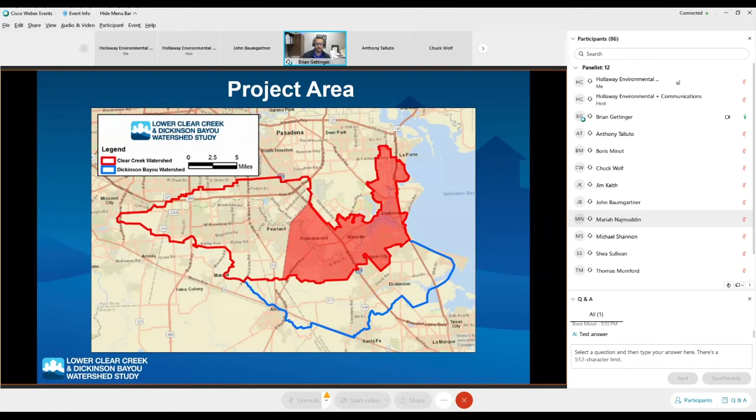A little more on the focus. I mentioned, and you're going to hear this a lot tonight, this is a riverine regional magnitude study. So that means that when we show damages, those damages are along the creeks. They may not be as significant as what actually happened during Hurricane Harvey.

So you might see one of our inundation maps and say, hey, I flooded during Harvey, but my house isn't shown as flooded on this map. That's because people further away from the channel may have flooded because of backed-up storm sewers and other things. One of the next steps we'll talk about toward the end is how we tie in those local analyses to make it a more robust effort.

We are looking at Atlas 14 rainfall intensities. That's the newest rainfall data available. We're looking at a 24-hour storm duration.

The flood risk analysis is going to show flooding along the creek, but damages and flooding instances are going to be higher than we talk about tonight. We're showing some very high damages and flooding instances, but in reality they're even higher. That's evidence from people's personal experiences, and from information we've got from the City of Friendswood and City of League City about what homes flooded and where they did rescues during Harvey. That's something we can tie into this now that we have the base model for the creek. The creek governs everything, and now that we have it, we can look at how those local storm sewers work.

So we are looking at 2, 5, 10, 50, 100, and 500-year storm events. The 500-year storm event is actually larger intensity than Hurricane Harvey. Hurricane Harvey, based on the new Atlas 14 rainfall data, is about a 125, 150-year storm event. So we did model Harvey, and we are looking at all those different storm intensities as well.

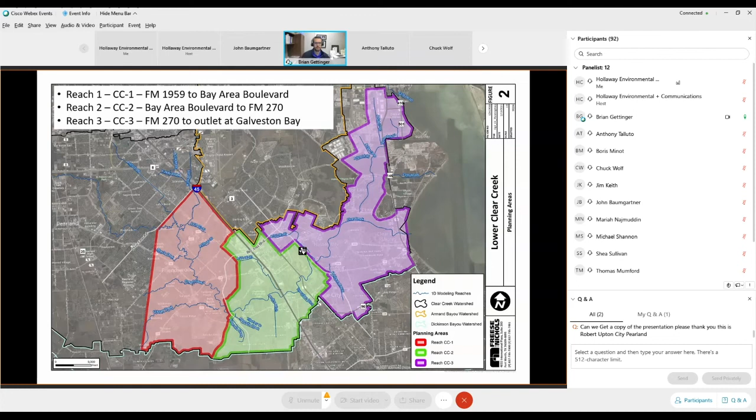So why are we here tonight? What's our purpose? The study is not done. It's getting close to being done, but we're here tonight to tell you what we found and allow the public a chance to weigh in on that before we finalize our final reports. So we have this slide deck, this material, a lot of analyses to present tonight, but we haven't written the final report yet.

We want to make sure we had a chance for the public to weigh in on what we're presenting, get input again from the stakeholders, and make sure that what we're presenting is what makes sense and what the public wants and needs to mitigate flooding.

Doing this whole project through COVID was challenging. We were able to sneak the first public meeting in person, so I appreciate the chance to meet a lot of you there. Online is different. I'd much rather be doing this in person with you guys, talking face to face. But we do have the opportunity to record this, and we can post it online. So I think we are getting pretty good feedback and information dissemination, which is good.

So tonight's about sharing results. We do want your feedback, we do want your questions. As you have questions during the meeting, please throw those in the Q&A, and we will address those either in real time for whoever's not speaking, or if we don't get to it, we'll get to it at the end after we're done with the presentation.

All right, so timeline. We are at the end, right? We're at March 2021. Initially, the project was scheduled to get done in May 2021, but we know every month counts, and we're looking at hurricane season starting again pretty soon. So we bumped this up a couple months to try to be as succinct as we could with the study.

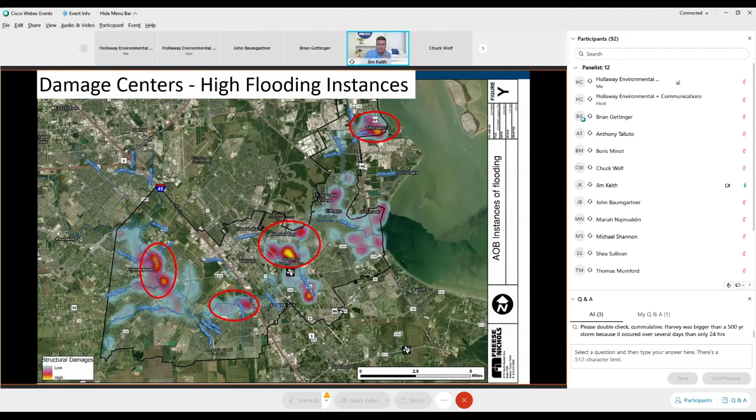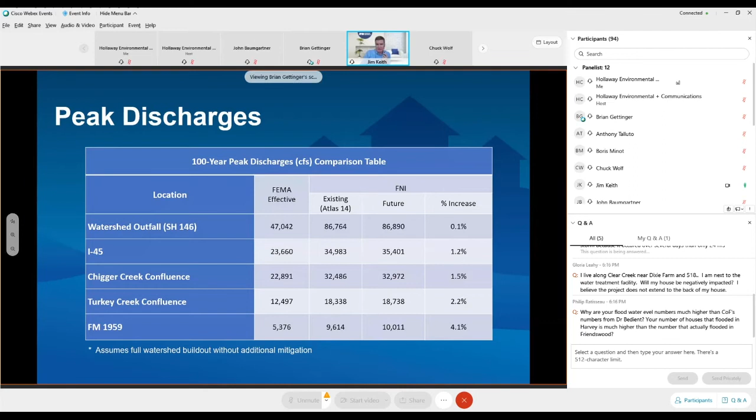The other thing that we looked at is future conditions. So we looked at projected land use 50 years into the future. Now, obviously, much of Clear Creek is already developed, so there's not a lot of changes that we saw here. There's a little bit of increase near FM 1959, but for the most part, we don't anticipate a lot of changes in terms of future runoff conditions.

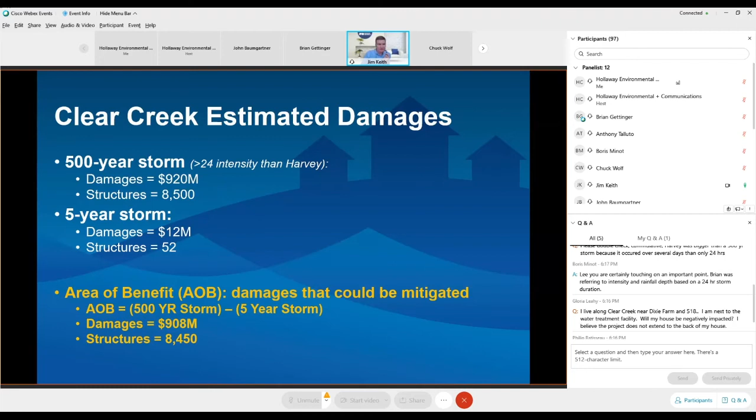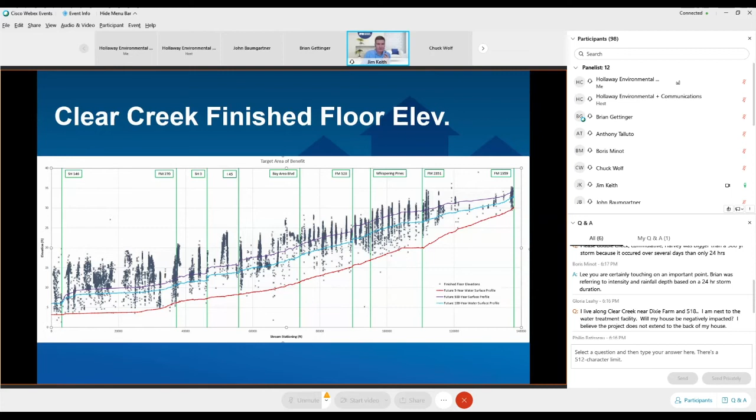To summarize, on the pure flood risk assessment of structures, we looked between these three planning areas or reaches. We looked at individual storm events. You can see in this table here, we looked at a 500-year event, 100-year event, 50-year event, 10-year event. But what is really informative, and what helps us quantify both costs and benefits, is to look at the estimated instances of structural flooding over a 50-year period.

If you look at the statistical projection of these different storm events, from frequent 2-year, 5-year, 10-year events up through the 100-year and 500-year storms, over a 50-year period, you can see that for the Clear Creek study area, we have over 10,000 instances of flooding that we would expect over that 50-year period. And the damage, just based on current property values, is $365 million.

And we know over the past 20 years, the actual frequency and intensity of these storms can vary greatly.

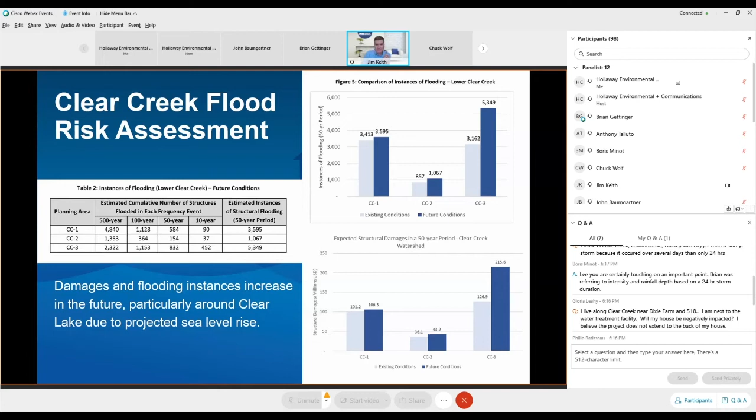The other flood risk, and a couple things we'll talk through here: the previous slides were really focused just on the riverine flooding aspect, but the other risk here in the lower end of Clear Creek is really sea level rise. The Corps of Engineers provided support for us on this project, developing sea level rise projections and also storm surge frequency projections.

For our study, we assumed in the future a water surface elevation of about 6 feet for all events greater than the 10-year event. This accounts for both a 5-year storm surge stage, higher than just high tide or normal high tide, assuming some storm surge coming from the event, as well as the mid-level sea level change projected by the Corps.

You can see there's a lot of structures in this red inundation mapping showing that elevation, and there's 225 structures, give or take, worth almost $90 million that are at risk just from that sea level rise assumption. The other thing is it really reduces our ability to get water out and reduce that water surface elevation downstream of FM 270. So this is another one of the challenges in terms of flood mitigation, as well as another flood risk we felt was important to communicate as part of this study.

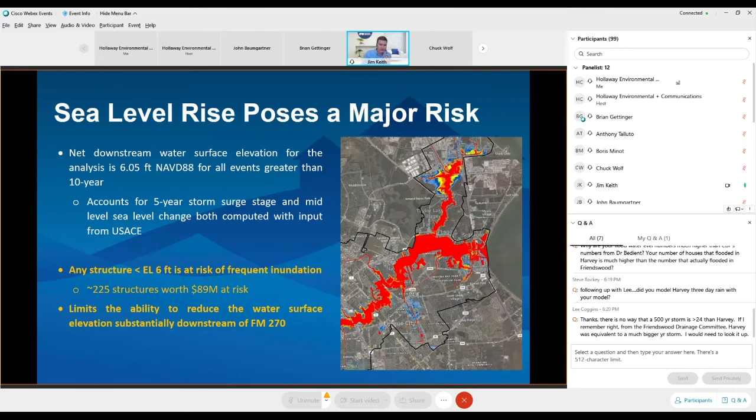The next things we looked at are transportation system impacts. Along with just structural flooding, when flooding happens, it impacts our ability to get around. It impacts your ability to go pick up your kids from school, get to and from work. It impacts emergency responders. So we used the United States Bureau of Reclamation's flood hazard calculation, which uses both the depth of overtopping of a roadway as well as the speed that water is moving to estimate what they call a damage classification or danger classification.

They have a low danger, medium judgment zone, and high danger zone. As you look at this map, red triangles are bad—those are areas expected to flood at a 5-year or less storm event with a high danger classification. The green circles are a low danger zone, even up to the 100-year event. The major crossing of greatest risk we identified was Whispering Pines Avenue, impacted in a 10 to 50-year storm event.

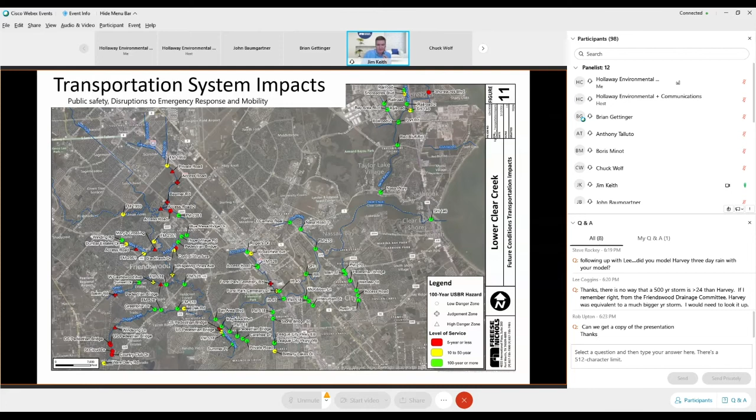Finally, we looked at critical infrastructure—water supply infrastructure, emergency services, schools, hospitals. This graphic shows the 100-year flood elevation, and you can see there's a significant amount of water infrastructure, those little water drop symbols, inundated in a 100-year event, as well as LaVaugh Stewart Elementary School, near SH 146 and Marina Bay Drive. A lot of the other flood risk results we wanted to communicate show how impacts propagate out from flood events for critical infrastructure.

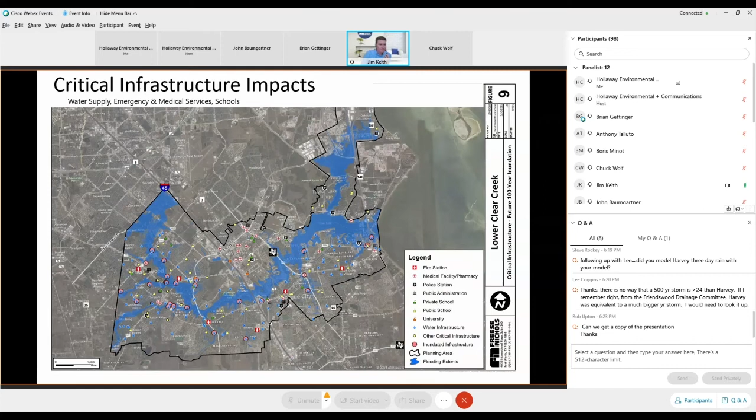So finally, just to summarize in terms of damage, future instances of flooding and future damage amounts in dollars: Reach 1 through Friendswood has pretty limited damage up to about the 10-year event. But once you get beyond that, the water starts getting out of the bank, and you see increasing orders of magnitude in both damage and instances of flooding—significant damage exceeding $1 billion and 4,800 structures for a 500-year event.

Reach 2 has a little less development than Reach 1 and 3, so there are fewer structures, but you see a similar pattern where damages escalate beyond the 10-year event. Reach 3 has less favorable performance relative to the 10-year event, due to sea level rise and the downstream water surface controlled by Galveston Bay. This structural flooding is from riverine flooding, so there are other impacts from local flooding and drainage not accounted for here, but we anticipate that could be looked at in future phases.

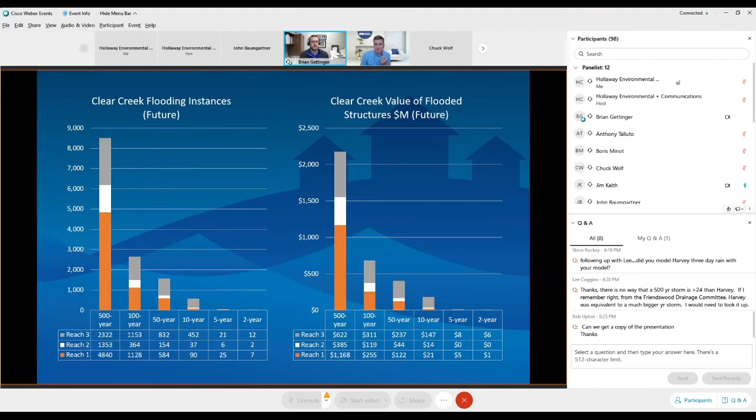I think with that, I'll pass it back to Brian to start getting into the mitigation alternatives. Thanks, Jim. Appreciate you setting the stage for us to talk through the alternatives here.

It can rain really hard. We looked at a lot of different storm events. The question now is, how do we evaluate those alternatives we're looking at? We talked through some of these concepts at previous meetings. We're going to present a lot of data in the next slides—for everyone's sake, the slide deck will be available for review later, so we're going to go through this pretty quick. We won't talk through individual alternatives tonight.

We'll talk through in detail the combination alternatives, and I'll spend time on each of the individual components. The final report, when published, will go through each individual alternative and show how it performs individually, but tonight we're going to focus on the combinations. First, let's talk about how we're going to evaluate them.

We're going to look at quantitative and qualitative evaluation criteria. Number one, how often is something flooding, and if we have an improvement, how much less often will things flood? That's instances of flooding, looked at over a 50-year period—a statistical analysis covering the 2, 5, 10, 50, 100, and 500-year storms, showing how often it's going to happen in a 50-year period. That's a standard practice established for benefit-cost ratio based analysis.

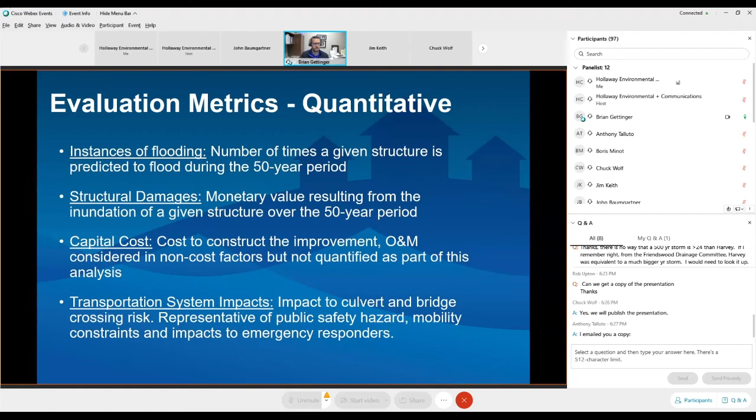Same thing applies to structural damage—the monetary value of structures is based on the depth of water in the home, an Army Corps of Engineers standardized procedure based on total value and depth, using the same 50-year analysis. We'll also look at the capital cost to construct these; as a high-level concept study, the cost doesn't have a lot of significant figures, but it is order of magnitude correct. Finally, Jim mentioned transportation system impacts—how many times culverts are overtopped, how many bridges are washed out, how many people can't get from point A to point B because the approaches are washed out even if the bridge isn't. We're going to keep track of that as well.

So obviously, we want projects that have great benefits, right? Instances of flooding go way down, damages go way down, and cost is as inexpensive as possible. But we also want projects that we can implement. Clear Creek has a long history of projects that have been proposed that never got implemented, so we want to find things that we can implement here.

There was substantial environmental concern, substantial community impact concerns, particularly in the section we're now calling Lower Clear Creek, from FM 1959 out to Galveston Bay. Obviously, now the upper section from 288 to 1959 is in the planning process and hopefully moving soon to construction. But there's been a lot of things discussed, and a lot of the concerns that came up in the 1980s, 1990s, and 2000s have informed our analysis.

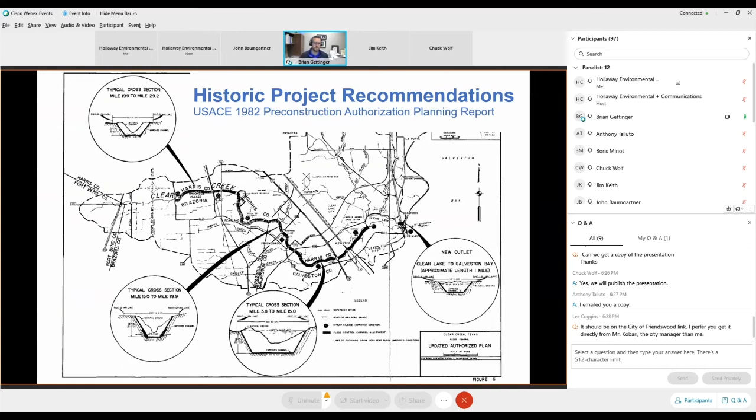So with that, let's talk through some of our constraints. Informed from the previous efforts, these are our 4 constraints that we applied to our concept analysis as kind of guide rails. So we were not going to widen the channel on Clear Creek downstream of Bay Area Boulevard.

There's significant environmental concerns there. Once you get past Bay Area Boulevard, it becomes tidally influenced very quickly. There's a lot of mud flats and very shallow areas. I know from personal experience, getting my boat stuck in a couple of them, actually twice on the same day one time. It is an environmentally sensitive area. Widening the channel there, although maybe possible, would be environmentally difficult to permit, and there'd be significant pushback to doing so. So we are not going to widen the channel downstream of Bay Area Boulevard.

We're not going to build a new bypass channel that creates an open cut crossing of I-45. I-45 is a major transportation corridor. Doing so would disrupt transportation for millions of people, and it's not seen as a good idea.

We're also not going to have any additional conveyance to Clear Lake, so we're not going to get water to Clear Lake faster without helping get water out of Clear Lake faster. We don't want to create a benefit upstream of Clear Lake and have a negative impact in Clear Lake. It just moves the problem downstream. We've got to get the water all the way to Galveston Bay.

We also are not going to do clearing and desnagging downstream of Bay Area Boulevard, for the same reason as not widening that section, because of environmental concerns. We actually did look at this one after some urging from our stakeholders, to make sure we weren't missing something there. In fact, desnagging in that section doesn't have a great benefit anyway. But that is our 4th boundary. So lots of concepts were developed, but these were the 4 things that we were not going to do.

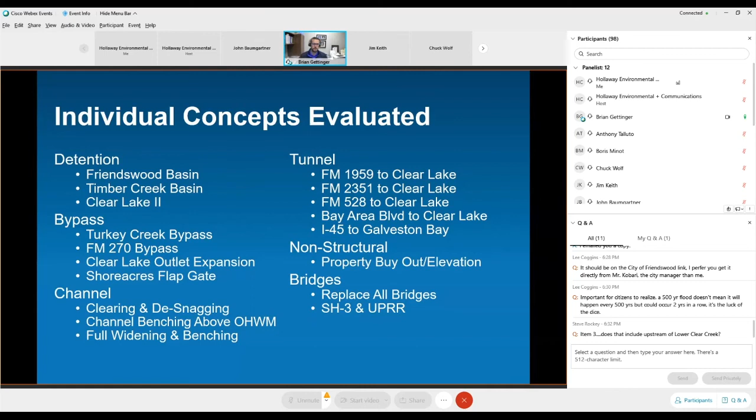So lots of things evaluated. It was kind of an exciting analysis to try to pair these up and create combination solutions that were most effective.

And you saw that on some of the bar charts earlier, that in the 5- and 10-year storm events, most structures on Clear Creek are well protected, and that's great news. There are still some that are in this 5-year risk area.

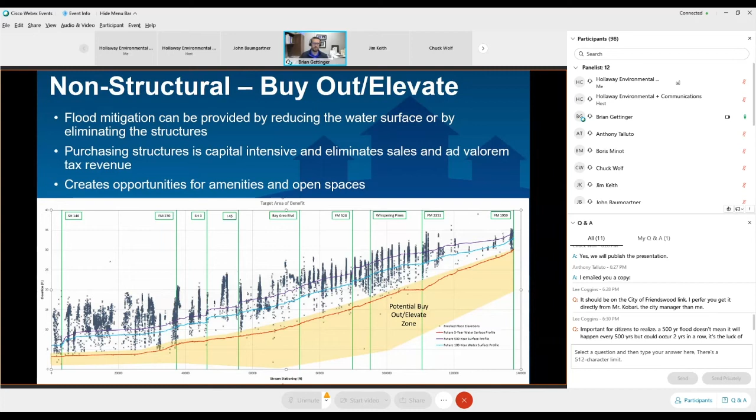Those structures are so far into the floodplain that even if we throw very large concepts into the solution set, it's impossible in some cases to pull the water surface elevation down far enough to get that property out of the floodplain. So those properties are good candidates for elevation, good candidates for voluntary buyouts. We don't identify those individually tonight or in this phase, but if you have a property that's flooding on a 5-year basis, it needs another solution than a major structural improvement on the channel.

So when I talk about 2 concepts that you're not going to see in the combination analysis, it's not necessarily because they're not a good concept, but because it wasn't part of the core modeling effort.

So it's pretty clear that the elevation in Taylor Lake and Shoreacres pretty closely follows what's happening in Clear Lake. The backwater effect is a significant factor. That backwater effect, combined with some needed local drainage system improvements, resulted in a lot of flooding. So one solution would be to cut that backwater off, essentially creating a flap gate system that would prevent tidal flows over a certain elevation from getting back into Shoreacres.

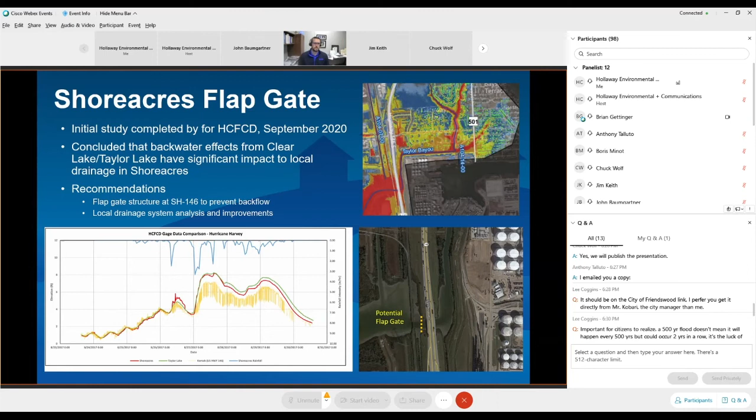Another thing we looked at, but is not included in the recommendation, is what we'll call a mega-detention pond. There's always the discussion about what's better for flood mitigation - should you build detention or should you build conveyance? We wanted to test out the detention hypothesis and see how big of a detention pond you would have to build.

In order to reduce the flow rate at I-45 by 5,000 CFS, you need a 3,000 acre-foot storage basin. In order to reduce the flow rate by 10,000 CFS, you need a 10,000 acre-foot storage pond. Well, what's 10,000 acre-feet? That's about the same size as Clear Lake.

Clear Lake is about 1,700 acres, so at 6 feet deep that's 10,000 acre-feet. It would be a gigantic water body.

Based on the development of Clear Creek, and because detention needs to be in the upper portion of a watershed, this would have to be located somewhere in Friendswood. It's unrealistic to site something this big in the watershed as it's currently developed. It's going to cost at least $500 million, probably just for all the dirt moving - that doesn't include property and permitting.

Major property acquisition results in loss of tax revenue. And also, the big concern, which comes up when we talk about Hurricane Harvey and Tropical Storm Allison, is what happens when it rains for 3 days?

Our analysis for this study was based on a 24-hour storm duration. The 24-hour intensity was much higher than Harvey's, but Harvey happened over 3 days, so it was a very large storm because it lasted that long. Detention ponds work great for the first day, but by the second and third day they're full. You could build a big pond, but with a multi-day storm it gets full, takes a long time to drain, and doesn't provide much benefit. So mega detention ponds were not something we recommended for further analysis.

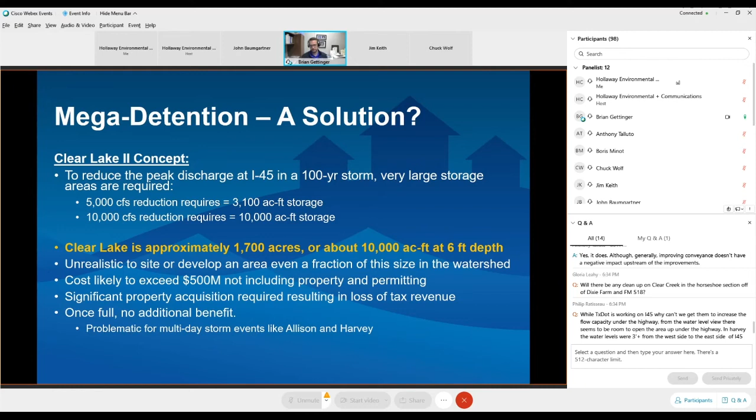We talked about what happened in the 1980s, 90s, and 2000s regarding the biggest problems with conveyance improvements. It was major channelization of Clear Creek, particularly south of 1959, from Bay Area Boulevard to Clear Lake. That section was very problematic from an environmental perspective. So we thought about how we could move this water without causing those problems.

One of the solutions we looked at is tunneling. Tunnels can move a lot of water and can be built in very large diameters. We don't have a lot of differential head at this low section of the watershed, but there is enough to move water.

So this would function as an inverted siphon. We looked at 5 different intake locations: one at 1959, one at 2351, one at 528, one at Bay Area Boulevard, and one at I-45. We did 3 different diameters - 30-foot, 40-foot, and 50-foot - all flowing entirely by gravity as part of our analysis. All of these discharge to Clear Lake except the I-45 tunnel, which discharges directly to Galveston Bay. Even the ones that discharge to Clear Lake assume hydraulic improvements are made to get that water out to Galveston Bay faster.

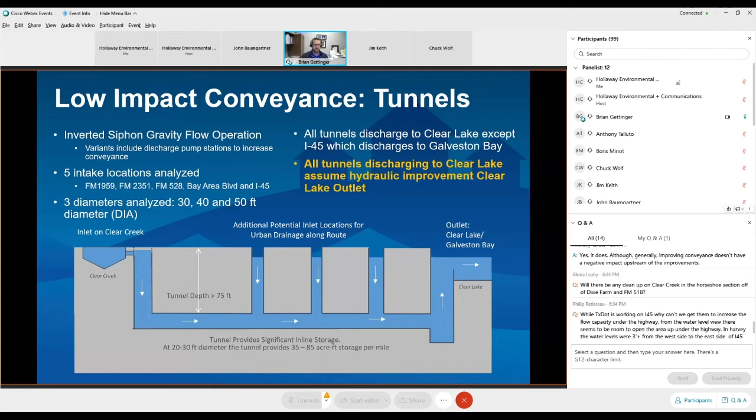So what do those different alignments look like? Well, if built, the alignment looks like nothing because there's an intake structure and an outlet structure, but along the way there's no disturbance. We had 5 different alignments - 4 of those discharge to Clear Lake near the NASA facility, Johnson Space Center, and 1 discharges following FM 518 at Galveston Bay.

We ran a lot of simulations on these, looking at different upstream and downstream conditions and different sizes. What we found is that the 2 tunnels that were most effective were the ones shown here in blue and red, which is the FM 2351 tunnel and the I-45 tunnel. So those 2 you're going to see later in some of the combination analyses.

These tunnels can be built following public right-of-way, and that's the reason a lot of these routes exist. They can make 1,000-foot radius curved turns, and this inverted siphon concept has been proven out in other places. The Waller Creek Tunnel in Austin exists, the San Antonio River Tunnel exists which protects the Riverwalk, and they're building a 35-foot diameter tunnel in Dallas right now for the same purpose.

So the big benefit here is we don't have the channel improvement happening at the surface, so there's no environmental impacts. The intake and outlet structures can be developed so they blend in, almost imperceptible to the public, or they could be curated as an amenity - they're doing both of those things in Austin with the Waller Creek Tunnel. It presents a lot of opportunities to move water without the challenges you have at the surface. We'll talk more about this as we get further into the analysis.

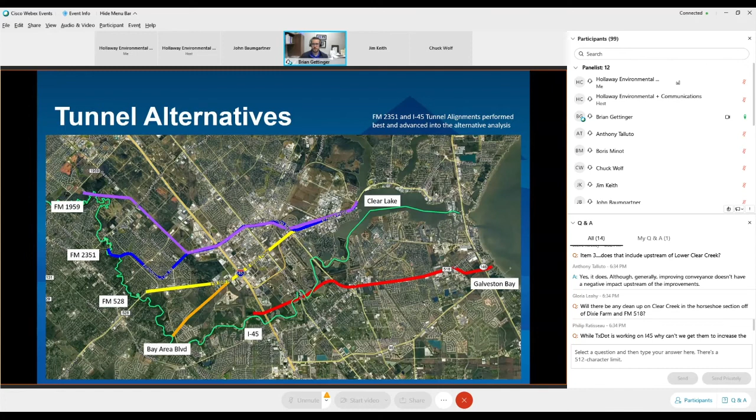The other thing I want to spend a minute on individually is the Clear Lake outlet expansion. The Clear Lake outlet is a complicated hydraulic structure. You've got the boat channel, or sailboat channel, out through Kemah, which is ungated - an open channel. You also have the gated second outlet structure, constructed as part of the federal project, recommended in the 1980s. So we've got two different ways to get the water out. You also have a channel that runs north to south connecting the two. So it is a complicated hydraulic structure there at Highway 146.

What we did see during Hurricane Harvey is that there was a higher elevation in the lake than there was in Galveston Bay, which seems to suggest there's an opportunity here - could we get more water out faster?

A lot of ways to do that. It's a complicated structure, one that we were not set up to model in great detail, but we noticed something that should be investigated further, in part because we're showing an 84% increase in flow rate due to the Atlas 14 rainfall data. The structure's outlet was designed as a collective system for a certain flow rate, and now we're seeing a lot more water because of things like Hurricane Harvey and the new rainfall data. An expansion of this outlet system is something we think should be investigated more in the future.

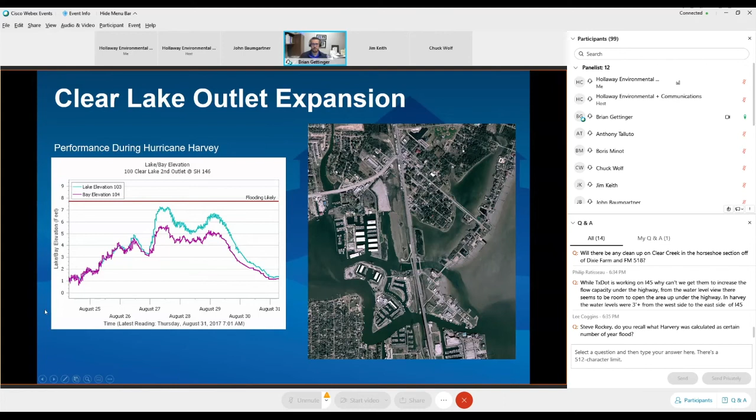All right, so individual mitigation effectiveness. We looked at a lot of different things. In this table there's a lot of data, something you guys can dive into as you get the slide deck, and it'll be reported in the report as well. We have different alternatives, and the more green something is, the better it performed. The more red something is, the more problems it caused.

So things that had red, like clearing and desnagging, have a good benefit, right? It eliminates structures, but it also moves water faster downstream, causing flooding. So when we have something like that, we've got to pair that solution with something else. Channel benching, same thing. Channel improvement, same thing. Remove structures, which is great, but it causes structures to flood downstream. So we can't have that. We've got to find a way to pair it.

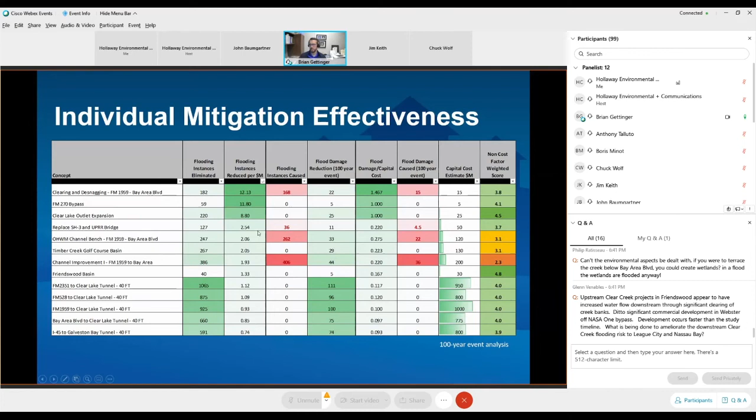So what did we find from looking at all these different concepts individually? Number one, we can't make improvements upstream of Clear Lake without additional outlet capacity into Galveston Bay. We ran a lot of model simulations, and whenever we got water to Clear Lake faster, we were showing impacts in Clear Lake where the water was going up instead of going down. We've got to find a way to get the water all the way to Galveston Bay.

Detention improvements - detention is good, right? It does help, but multi-day storms fill the basins up, and you can't get that water downstream. You have to get it out of the system, right? If we just store all the water in the system and all the detention basins get full at the same time, then we have a problem. So detention helps, but it's not by itself a solution.

Conveyance improvements in Friendswood really help Friendswood, but we have to be careful because some of them are causing downstream impacts nearly as large or larger than the benefit they're providing. So we need to pair those conveyance improvements in Reach 1 with conveyance or storage improvements in Reach 2 and 3. We've got environmental challenges between Bay Area Boulevard and FM 270 that we talked about, which limits the ability to build the conveyance needed at the surface or build any additional storage.

Tunnels can move a lot of water. They can provide protection against very large storm events. You can even supplement them with pump stations and other things to increase their capacities, but they're very expensive, right? And they're something that's not commonly operated in this area, so it would be something kind of new.

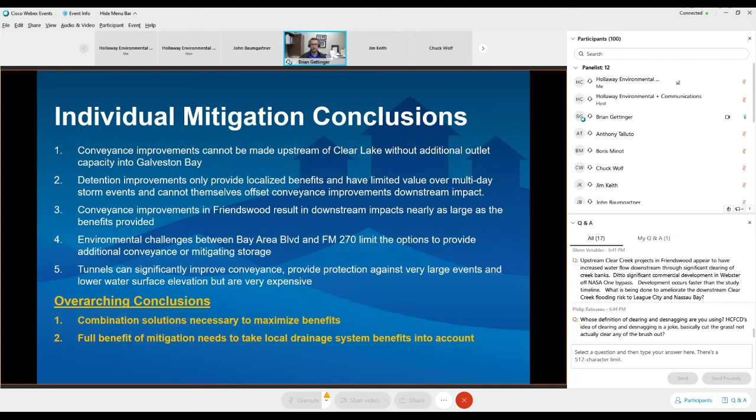All right, let's talk about the combination solutions. That's what everyone's here today to hear about. So what are we going to look at for our combination solutions? We have 3 different scenarios.

One is called conveyance improvements. This is the least expensive of the 3. It includes 2 large detention basins at the upstream end of Reach 1, clearing and desnagging, taking out the Highway 3 and Union Pacific Railroad track bridge and replacing them with a more hydraulically efficient bridge, a bypass of FM 270, potential voluntary buyouts, and an improvement to the outlet structures at Clear Lake - the Kemah Channel and the other structure - to increase conveyance out of the lake and prevent impacts. That's our lowest cost solution.

It's shown in purple. The next one we looked at was: how much better can we make the benefits if we add a tunnel to it? So if we add the FM 2351 tunnel, which goes from Clear Creek and FM 2351 down to Clear Lake, at 40 foot in diameter.

The third solution takes those conveyance improvements, but instead of the 2351 tunnel, puts the tunnel in at I-45. This tunnel doesn't provide as much benefit in the upstream section, so in addition, we're also going to bench the channel above the ordinary high water mark from 1959 all the way to Bay Area Boulevard. Because this tunnel does not discharge to Clear Lake, we don't need to build any expansion in the lake. Expansion of the lake could still be built and would provide additional benefit, but it's not necessary since the tunnel is diverting a lot of water away from the lake.

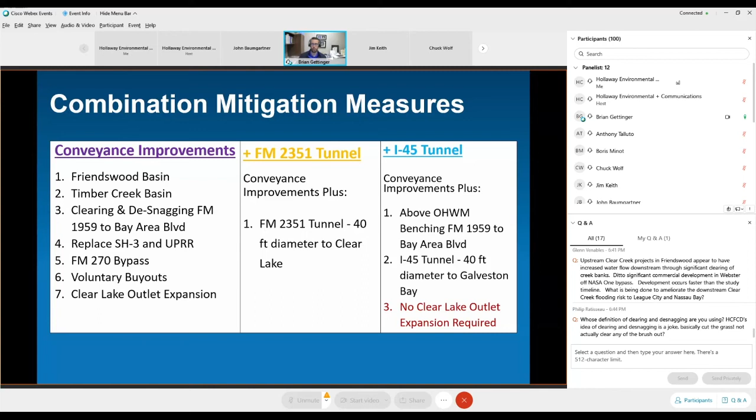Let's talk through what we've got. The Friendswood Basin is on property owned by Harris County Flood Control District. For this analysis, we assumed Friendswood Basin was entirely devoted to providing benefits for the downstream section of the watershed and not offsetting any upstream improvements. It's about a 1,350 acre foot basin, which provides benefit to that area, kind of local to it.

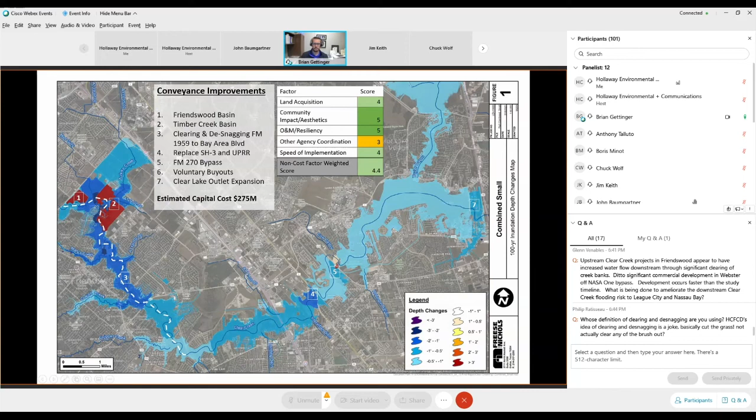So what order does it have to be done in? Some of these things can happen in any order. There's no mitigation required with the basins — they're self-contained. The outlet expansion is happening at the very downstream end, so it doesn't have to be constrained by sequence.

But we can't do some of these things without others first — we have some predecessor activities. The Clear Lake outlet expansion has to happen first, before you do the FM 270 bypass, before you do the Highway 3 Union Pacific Railroad track bridge, and before you do the clearing and desnagging in Reach 1. Put all those things together and you get a great project, but you have to do them in the right order, otherwise while you're working on it you're going to create impacts along the way.

So how does this stack up quantitatively? We're going to spend, just on ballpark numbers, $275 million in capital. We saw the bar charts before showing flooding instances by event — in a 100-year, 24-hour storm, this would prevent 762 instances of flooding, with damage of $83 million, and it would reduce the water surface elevation at I-45 by almost a foot.

When you look at that on a 50-year basis, you've got about 2,000 flooding instances that would be eliminated, with a total damage of $62 million.

On an efficiency basis, that's 7 instances of flooding for every $1 million invested, or about $140,000 per instance of flooding reduced. I caution us not to focus too much on these numbers. They're important because they talk about the riverine aspects, but if we reduce the water surface elevation along the channel, we're going to create a lot of local benefits in the storm sewer network. Those numbers aren't included here, but this is a good baseline for comparison between this and the other alternatives. We want to get this number down. $140,000 per instance - can we get that number down? Can we get more flood reduction for these other numbers?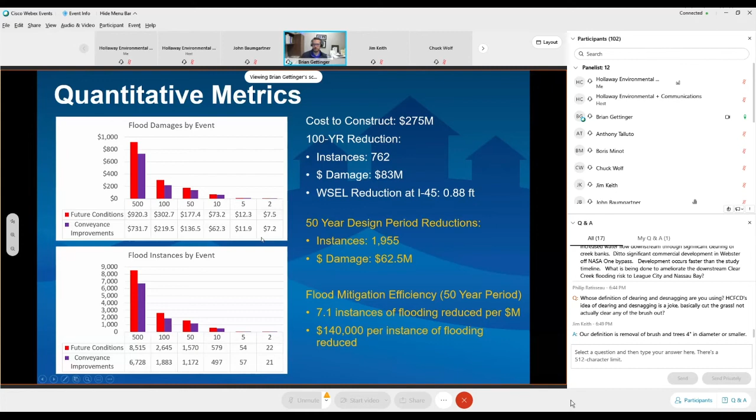That's what we're going to talk about with some of the other combination alternatives. But some takeaways here.

Personally, I was a little surprised that the clearing, because the channel is so vegetated in Reach 1, significantly reduces flooding in Friendswood. That's good news. But the downstream impacts still happen. They're partially offset by the 2 large detention ponds, but not completely.

The Highway 3 bridge improvements provide greater benefit than doing the same thing to I-45. And I-45 is actually already being improved right now, so that's already happening. The Clear Lake outlet expansion helps us make sure that the Highway 3 and FM 270 construction points, getting that water through, doesn't cause downstream impact.

The challenge we've got, and this is going to be common to all these, is that the storm surge and particularly sea level rise around Clear Lake, which Jim talked about earlier, limits our ability to significantly reduce the water surface elevation once you get past FM 270. It's downstream controlled, and it's a wide water body. There's a lot of residual risk to those structures in the lake area, and it's nearly impossible to eliminate the flooding concerns for some of those areas because of that storm surge and sea level rise, no matter how much water is diverted or stored.

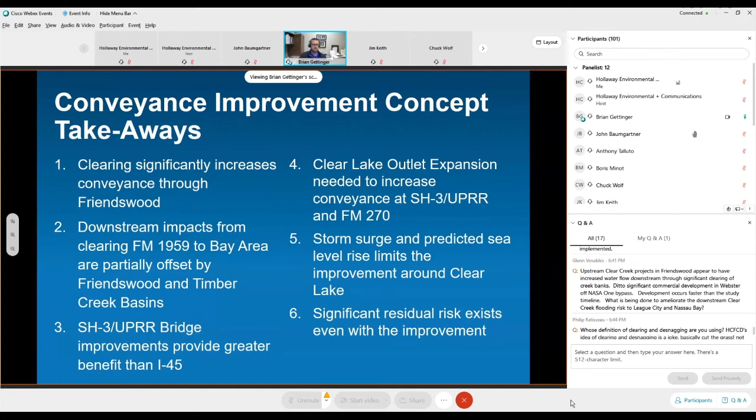All right, so we talked about the conveyance improvements. Let's talk about the plus-a-tunnel option. This is identical to the previous case, except we added in a tunnel, which is a big tunnel - 8.5 miles long, with a conveyance capacity of about 11,000 CFS. That's 11,000 basketballs per second passing through this tunnel at its maximum head condition. That's enough to fill the Astrodome up with water in about an hour. It's an incredibly high amount of water moving through the system. It starts at FM 2351 and drops off into Clear Lake.

The problem with the tunnel, we talked about, is that it's expensive. This bumps our capital cost up from $275 million to $1.25 billion. The tunnel itself is a nearly $1 billion project.

But we can see on the color scheme what it does. All of a sudden that entire section of Friendswood is purple, meaning the water surface elevation from about Turkey Creek down to almost Bay Area Boulevard is now 3 feet or more reduced. And we're not causing a downstream impact because of the second outlet structure, and we're not creating an environmental or permitting problem because we're not touching the channel downstream of Bay Area Boulevard.

So there's some significant benefits, and the yellow line is the approximate route of that tunnel. That's something that could be refined much more in the future - you see there's some bends here that could potentially be taken out, which would shorten the distance and maybe shrink the cost a little bit. But as we go through Friendswood, Houston, and Webster, if there's flooding happening along some of these channels, that could be dropped right into the tunnel and give us a chance to get additional benefits.

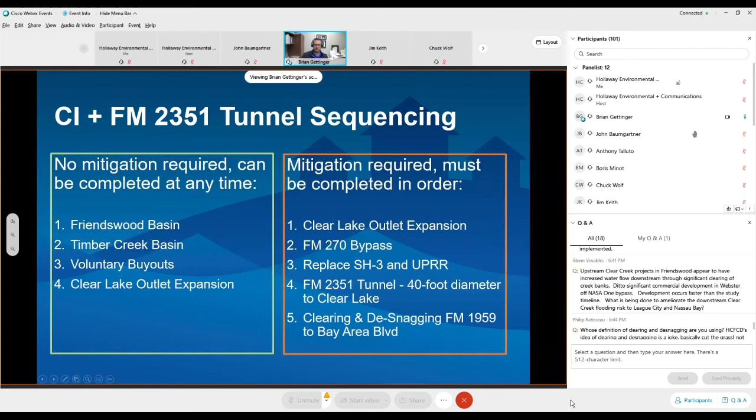So the mitigation order is similar. We can't get that tunnel built until we improve the outlet, otherwise that 11,000 CFS is going to cause problems in Clear Lake. Otherwise, the sequencing is the same as previous.

Quantitatively, we increased our construction cost a lot, and we also increased our benefits. The project benefits on this one increased about 50%, but we increased our project cost by a lot more than that. So we are seeing improvements - over 1,000 structures in a 100-year event, and over the 50-year design life we're seeing over 3,000 structures. We're seeing the water surface elevation drop by an additional foot at I-45, which is a nice improvement. But you look at the efficiency numbers and we were at $140,000, now we're at $400,000 per instance. We need to find a way with this one to get this number down.

And part of that is by tying in local benefits. Every instance of benefit on a local sewer network brings this number down. So this tunnel is much more effective because it moves a lot more water, but it doesn't necessarily score well just looking at the riverine impacts. We need to tie in the local benefits to make it score better.

So what do we take away from this one? In some cases, you're getting more than a 5-foot reduction in water surface elevation at FM 2351 at the tunnel intake. That's a dramatic change in the floodplain. The discharge at Clear Lake is great as long as we improve the outlet with some better way to get the water to Galveston Bay.

The tunnel cost could go down a few ways. One, make it shorter, take some of those bends out. You could also supplement the tunnel with a pump station. That would allow you to maybe go from a 40-foot diameter down to 30, which costs quite a bit less, and would also allow us to pump through storms when we have downstream head conditions like a surge event.

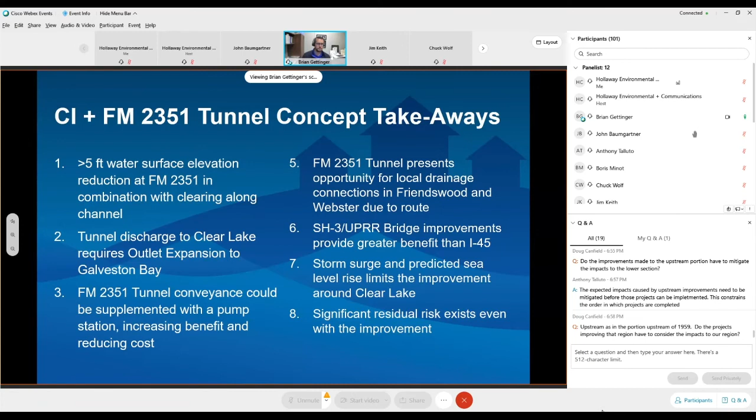All right, so the other tunnel. We looked at two different tunnels. This one has a couple different changes because the tunnel in this case doesn't start until we get to I-45. So the intake is just on the upstream side of I-45. It follows FM 518 out to Galveston Bay directly. It does not go through Clear Lake.

In order to make sure we're still providing a lot of benefit in Reach 1, instead of doing the clearing and desnagging, we're benching the channel above the ordinary high water mark from 1959 all the way down to Bay Area Boulevard. So we still see a large benefit, in purple, over 3 feet happening up to 2351, and then we get a 2 to 3 foot reduction there, and then it starts to tail off a little bit before getting picked up again by the tunnel.

The tunnel is shorter, it's 7.1 miles in length, same diameter, 40-foot. Because it's further down in the watershed, there's less differential head. It's lower than the FM 2351 tunnel, so it can't move quite as much water by gravity. So this is 8,200 CFS. It would take about an hour and a half in this case to fill up the Astrodome.

This one performs the best at I-45 by dropping the water elevation over 2 feet. And since there's no discharge to Clear Lake, we essentially create, in this case, almost a third outlet into Galveston Bay with the tunnel.

So on sequencing, the tunnel needs to get built before you build the bypasses at FM 270, the new bridge, and certainly before you do the ordinary high water mark benching through Reach 1. But it could be built without waiting on any other things. In this case, if it was found that we might as well improve the Clear Lake outlet to Galveston Bay anyway, that's something that could be done, and it would just provide additional benefits, not necessarily needed to offset impacts.

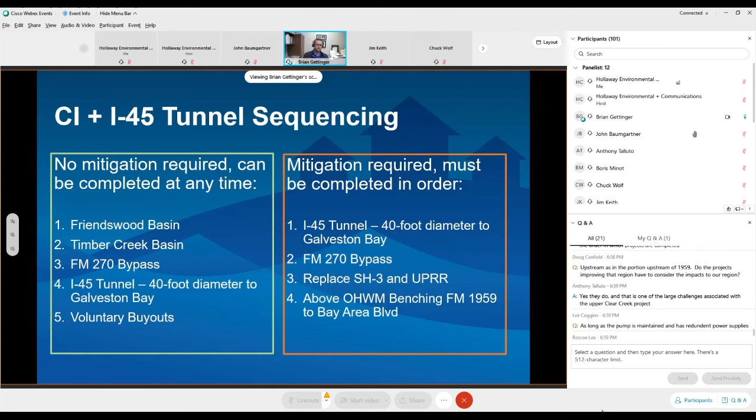So on a cost basis, this one costs less than the 2351 tunnel. It also has slightly fewer instances, but kind of in a similar ballpark. It has a better benefit at I-45, slightly less benefit through Friendswood and Reach 1, with 2,300 instances of flooding on a 50-year period. Some of this is just because right now Reach 2 does not have as many structures as Reach 1 does, even though it has a greater water surface elevation reduction in that area.

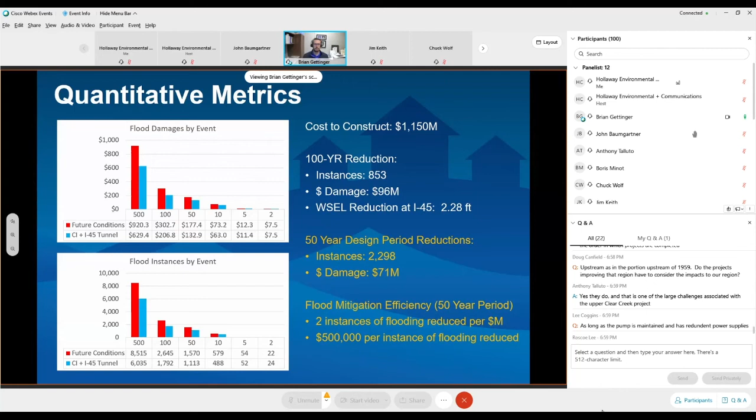So much like the tunnel from Reach 1 to Clear Lake, this one, we need to tie in those local instances of flooding, particularly following 518 through a populated area. There's a lot of opportunities to improve these numbers with those local benefits.

So the benching is really effective in Reach 1. It's actually, in some cases, overly effective. We'll look at a water surface elevation map in a second. But north of 2351, it reduced the water surface elevation so much, we're actually maybe moving too much water downstream, which is kind of washing out our benefit from 2351 down to Bay Area Boulevard. So we might actually say, let's not bench this thing all the way back to 1959. Let's only clear and desnag that section and start the benching at 2351.

The benching begins to cannibalize itself once you get upstream of Bay Area Boulevard, which is something we've got to keep an eye on. We don't want to make improvements that maximize benefits and then start cannibalizing themselves by causing flooding.

We talked about the no-outlet expansion. Just like the other tunnel, this tunnel could actually benefit even greater because it has such little head between the upstream and downstream end. If you put a pump station on it, the diameter could go down, and you probably could move even more water than assumed by gravity here, getting closer to 11,000 CFS, which would provide additional benefits and additional water surface elevation reduction on the creek.

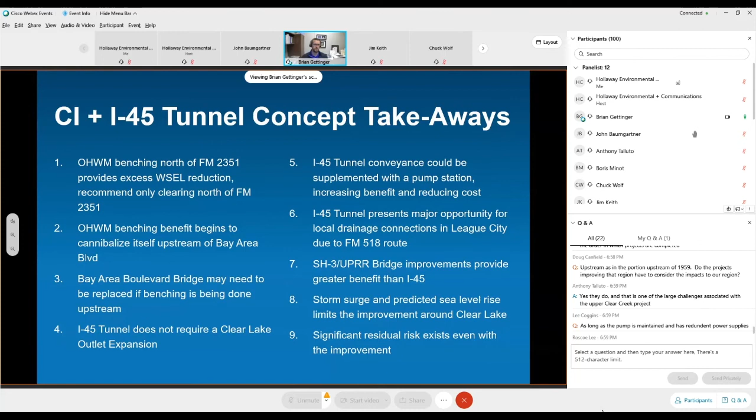All right, so we did a lot of analyses, a lot of different permutations of this. What did we learn looking at these three things in total? So we're back to our map with all the X's along the creek.

In this case, the red line is the future conditions 100-year storm, 24-hour event with no project. And then we have purple, blue, and yellow — those are our different combination solutions. Purple is no tunnel, blue is the I-45 tunnel, and yellow is the 2351 tunnel.

Let's look at these a little bit, upstream and downstream. Focusing on upstream first, zoomed in on the section from Bay Area up to 1959, we've got clearing on the channel, which provides a pretty significant benefit — multiple feet of reduction through Friendswood, which, in my opinion, was actually a little surprising. We could get that much benefit just by removing vegetation.

You see the yellow line, the tunnel that starts at 2351 — a huge drop. That's right at the intake, the point of inflection there, over a 5-foot drop right at 2351, really taking a lot of those structures out.

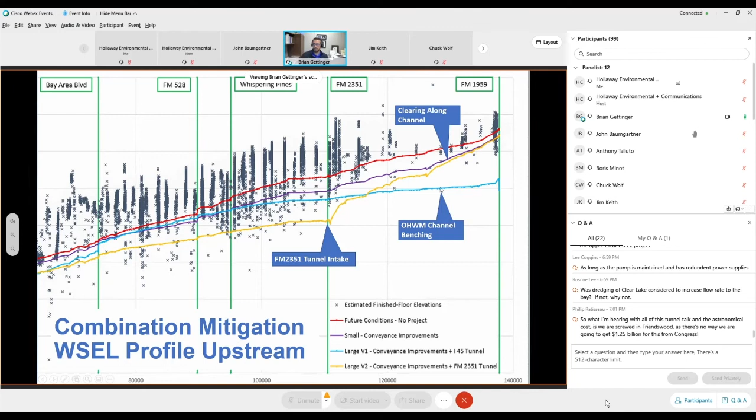But we also see that the ordinary high water mark channel benching has a lot of benefit, and this is what I'm saying with excessive benefit — we almost have too much benefit happening here. Now, that could be a good thing if we wanted to allow more flow from the upper section of Clear Creek to come through lower Clear Creek.

We could maybe say let's do this as clearing and desnagging for this section instead, because what's happening is this water is moving more effectively from 1959 downstream and probably washing out some of our benefit between 528 and 2351, which is where most of the structures at risk are. So if we change that back to clearing, I think we'd see this blue line drop a little bit right where we want it to, which could provide us some benefit and actually cost less, because the clearing is cheaper than the high water mark benching.

Looking at the downstream end, a couple things jump out. Number one, at the very outlet point, you see all of these alternatives converge very quickly, which is a little surprising, because in the case of the I-45 tunnel — the blue line — we've moved 8,000 CFS out. It's not going out this way anymore. But remember, this flow rate is now at 84,000 CFS, so 8,000 CFS is a lot, but it's only 10% of the total flow. So it's lower than the other lines, but almost imperceptible.

We do see a big drop at I-45, and the lowest drop is with the blue line. I think it could even go lower, because that 8,000 CFS could potentially be increased to 11,000 CFS with a pump station.

But there are a lot of structures along the lake that could be at risk. This is all done on a slab elevation basis, and structures we knew were elevated were moved out, but there's probably some structures here that may actually be elevated that aren't shown. Once you see, this is not elevation 0 — not our daily 1 or 2 foot elevation in Clear Lake. This assumes we've got a 6 foot elevation in Galveston Bay, so the water surface elevation is elevated, which we did see during Hurricane Harvey — Clear Lake was about 8 feet.

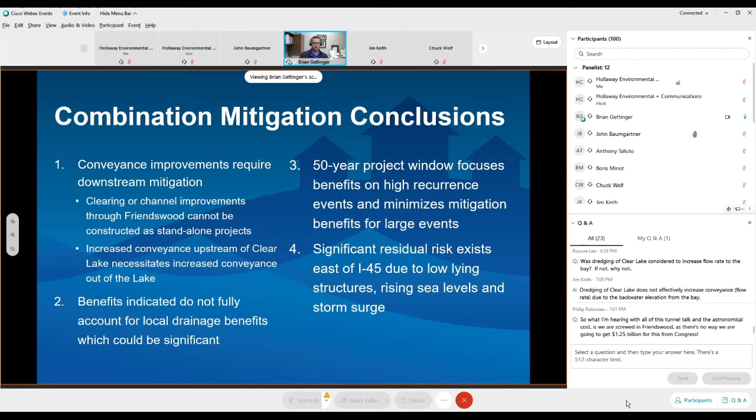So tunnel solutions had the best benefit, right? But the 50-year window kind of almost penalizes them because they're really focused on the 100 and 500-year storms. Harvey was bigger than a 100-year storm, and we all know that it lasted more than 24 hours.

So conveyance improvements are not duration dependent. We need those conveyance improvements so that when we have a storm that lasts more than one day, or say it rains really hard on Monday and then really hard again on Wednesday, we've got that infrastructure built to get the water out. And that's what those conveyance improvements provide.

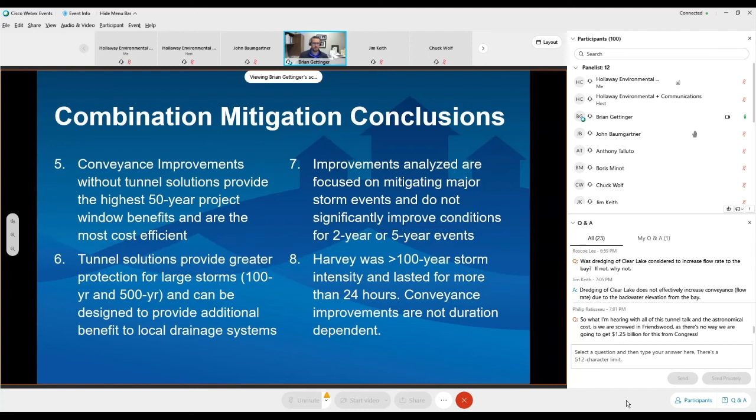All right, we've talked about the how, we're talking about the what. Let's talk about the how a little bit. One of the biggest how questions is: how do you pay for it?

So there's a lot of different ways to pay for these kinds of projects. None of them are easy, right? I think we need to be upfront that these are all expensive projects and they're going to be challenging to fund. It's important that we attack this in a strategic way. There's very rarely going to be free money for projects. Like the saying goes, there's no free lunch, there's very rarely free money.

All these programs that exist have local match requirements in most cases, which can be a significant percentage. They have financial reporting requirements, certain contracting rules have to be followed, and in some cases that can make them more onerous than they are helpful.

So we don't want to walk into a funding program with our hand out for money until we understand how it's going to help, how it's going to affect the project, and how the project can use the program. It may be that there are multiple programs used, so we don't try to lump this all into one bucket. We use a multiple bucket approach and attack each of these solutions individually from a funding perspective.

So where does the money come from? We've got kind of 6 key entities that are key here. In the center, the Army Corps of Engineers. If you talk about large flood control projects, they are one of the partners most commonly engaged.

They're actually already engaged in this project. They were part of the Planning Assistance to States grant. They were very helpful looking at particularly downstream conditions and providing us technical review comments on our deliverables at this phase. So we've had them at our hip helping us through, so they're obviously on that list.

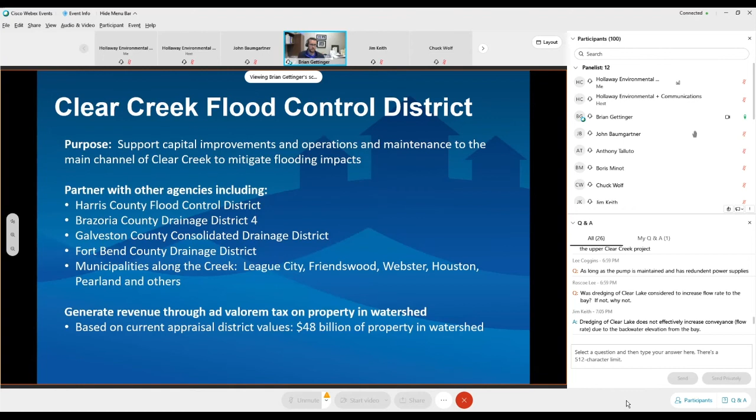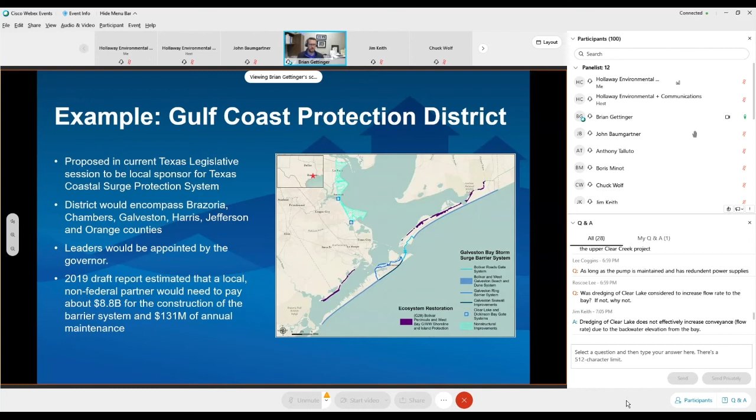So there's a big dollar sign for construction, and then there's maintenance. This district would be responsible for both of those things. A similar structure could be proposed for Clear Creek, or the Gulf Coast Protection District would require some changes to how it's planned, and could potentially have some additional flood control benefits tied into it. Much larger project covering a much larger area, but something that is a good example for what that looks like.

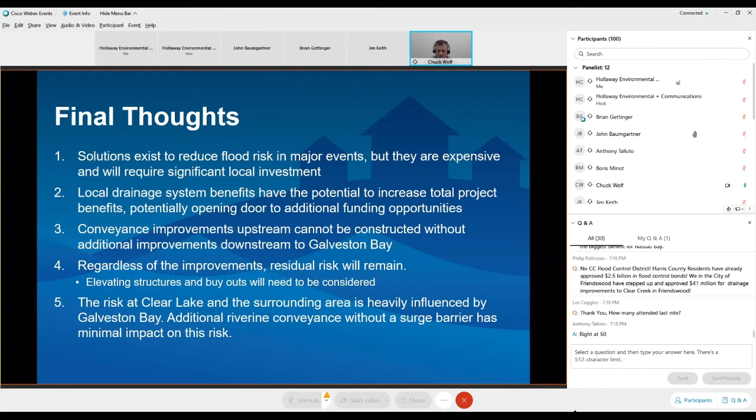The risk at Clear Lake and the surrounding area is heavily influenced by Galveston Bay. Additional riverine conveyance without some sort of surge barrier will have minimal impact on that actual bay risk. That's something we've seen from the study that would also probably bear further fruit from further evaluation as far as how those interactions happen.

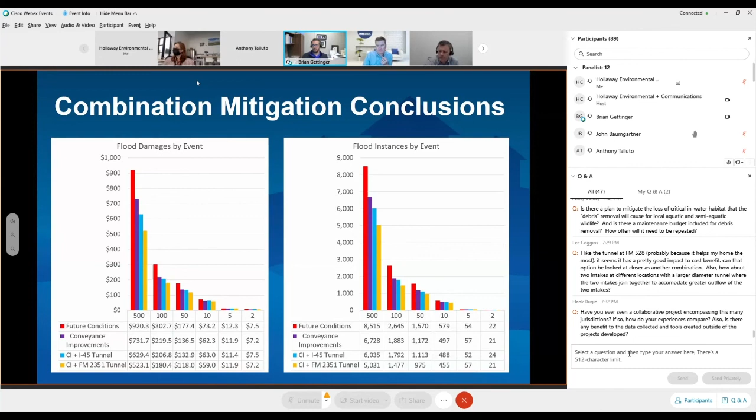So it is something we're looking at, and the good news is that we have this model now, so we have the ability to run additional scenarios and mitigation ideas. If changes are being planned to large areas of land, the municipalities and counties will have this model and can check how that's going to affect the creek. This is intended to be a tool that updates what was a relatively older model on Clear Creek with new LiDAR data, new rainfall data, and can be used going forward for future development as well.

All right, this next question I can answer partially, and Brian, if you want to add to it: will all the Q&A be posted? I can give you the short answer in that we will be capturing all the comments and responses in the Phase 3 documentation and in the Lower Clear Creek Watershed Study documentation.

The next question: if local flows combine into the tunnels, won't that reduce the flood reduction benefits seen along Clear Creek? That's a good question, I'll start and Jim can chime in. The riverine analysis assumes that local flow is getting to the creek through a 2D mesh. Whether it's getting there through the 2D mesh or through a culvert, it's still getting there. Sometimes the timing is a little different for how long it takes to get from one place to another, so it's something we need to check, but I don't think we would see a major reduction in benefit along the main channel by tying in local drainage.